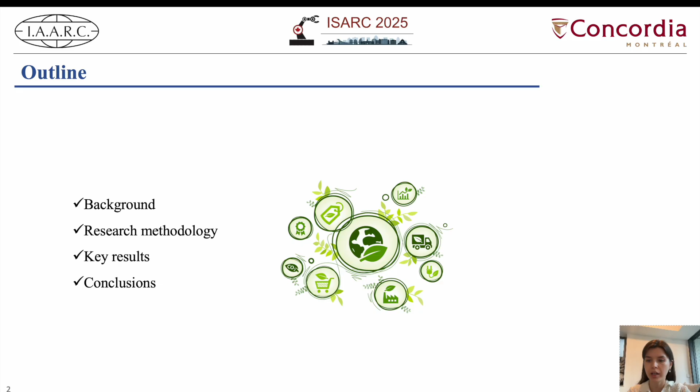The construction industry is responsible for a significant amount of global carbon dioxide emissions, resource and environmental damage and degradation. Traditional concrete relies heavily on natural resources like sand and cement, both of which have high ecological costs. In this work, we explore how waste concrete materials, specifically recycled fine aggregates and industrial byproducts like fly ash and blast slag, GGBS slag, can be transformed into valuable resources for 3D printed construction.

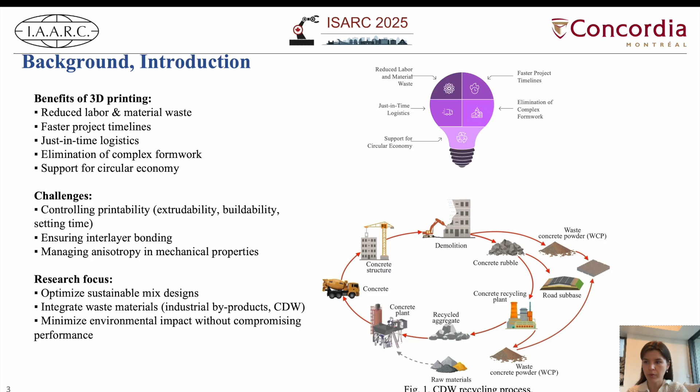We evaluate both the technical performance and sustainability impacts of these materials, including a detailed life cycle assessment comparing 3D printed structures with traditional casting. Our goal is to offer a more sustainable and economically viable pathway for the future of construction. And now let's go to our methodology.

The methodology consists of several key stages. We started with a comprehensive literature review with three steps: 3D printing in geopolymers, 3D printing with recycled aggregates, and the incorporation of waste concrete into 3D printed materials. Based on insights from the literature review and based on the results of our preliminary laboratory testing, we developed a

mix design. We prepared four different samples, two for 3D printing, one with natural fine aggregate, and another one with recycled fine aggregate, and also two samples for casting with natural and recycled fine aggregates. Next, we evaluated the fresh properties of each mixture to assess printability and workability.

After that, we conducted compressive strength tests on the 7th day of the carbonation curing. These tests were performed in three orientations, XYZ, to reflect the anisotropy behavior of 3D printed concrete, and it was in accordance with standard procedure.

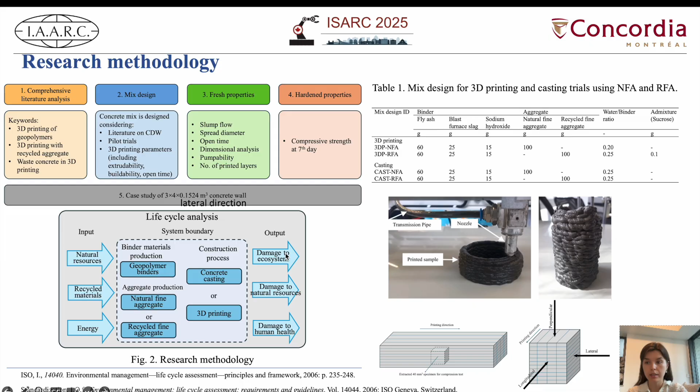Finally, we carried out a life cycle assessment to compare the environmental impacts of 3D printed concrete with traditional casting. And the life cycle assessment focused on three key categories: damage to ecosystem, to natural resources, to human health.

In our life cycle assessment, we examined a realistic case study of a standard concrete wall constructed using both 3D printing and traditional casting methods. We considered not only the materials but also the energy consumption, equipment, and time requirements for each stage of the construction process. For 3D printing, we accounted for the energy during mixing, printing, and infill, as well as the time needed for material preparation and extrusion.

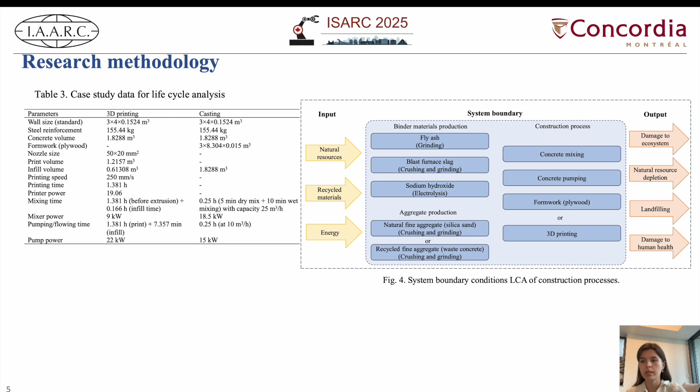In the casting process, we included the use of formwork, mixing operation, and pumping, along with the energy associated with each step. We observed that the recycled aggregate mixture for casting had the lowest slump due to the irregular shape of the recycled particles. So for 3D printing, this mixture was initially too stiff to pump, so we added a small amount of sucrose to improve its flowability.

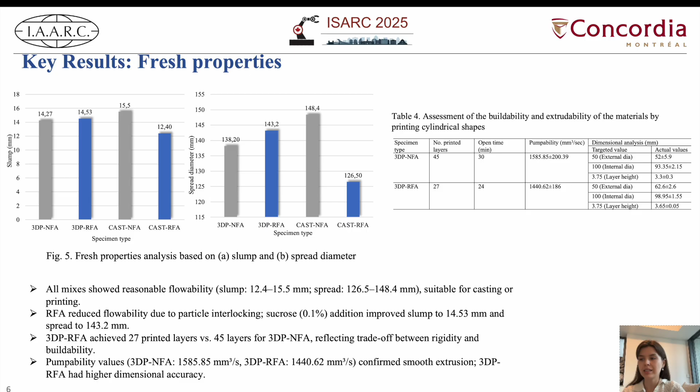Recycled mixture showed better dimensional control, which was confirmed through real-time printing trials. Overall, all mixtures with recycled fine aggregates showed better stability and dimensional accuracy, which are key for successful 3D printing. We evaluated the 7-day compressive strength.

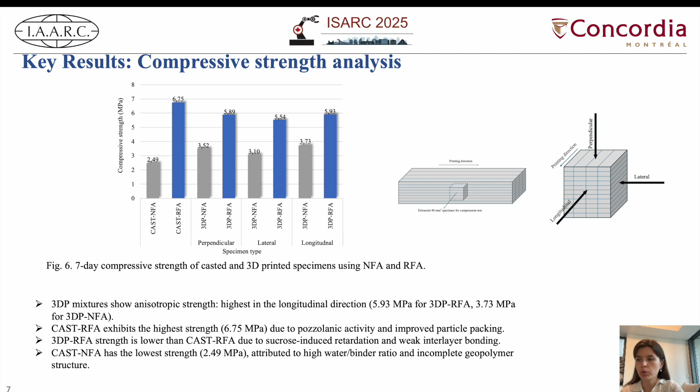As expected, the cast samples with recycled aggregates showed the higher strengths overall due to better compaction and a more monolithic structure. And the 3D printed samples show slightly lower strengths, especially in the lateral direction due to the layered structure and presence of interfacial voids. So strengths varied depending on the loading direction, with the highest values recorded along the printing path. Recycled aggregates performed well in both methods, demonstrating their strong potential for structural application in 3D printed construction.

In our case study, we found that the use of recycled aggregates reduced global warming potential by over 6% in 3D printing and about 4.5% in casting. Among the two methods, 3D printing consistently showed lower global warming potential, primarily because it avoids the use of plywood formwork, which added nearly 20% extra emissions in the casting process.

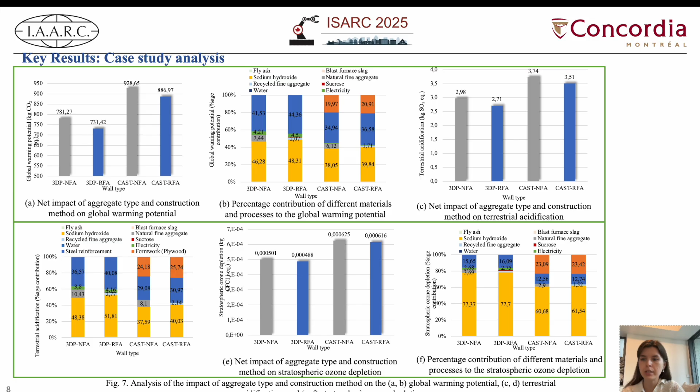We also observed that sodium hydroxide and steel reinforcement were the main sources of environmental impact due to their energy-intensive production process. Overall, 3D printing with recycled materials not only performs well technically, but also significantly reduces environmental impact, especially in terms of global warming, acidification, and ozone layer depletion.

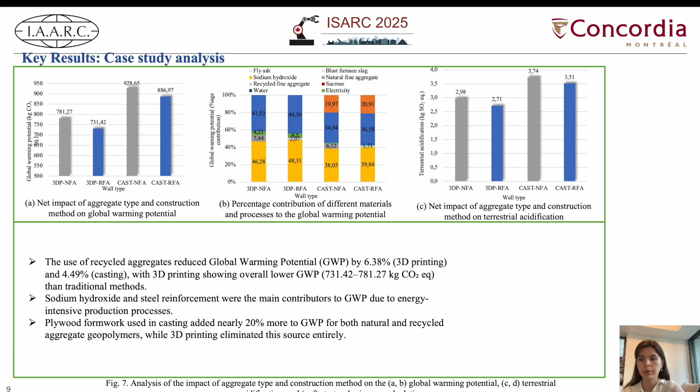To evaluate the overall sustainability of each material and method, we used the overall performance index, like rank. This index combines and normalizes all impact categories across ecosystems, resources, and human health dimensions. In our study, all categories were equally weighted, and the results show that the 3D printed wall using recycled materials had the lowest overall environmental impact and ranked first.

Compared to casting, 3D printing reduced the total environmental impact by nearly 30%, and the use of recycled aggregates contributed an additional 6% improvement. Our sensitivity analysis focused on the reusability of plywood formwork in the casting process. While materials like sodium hydroxide and steel cannot easily be reduced without compromising strength, formwork can potentially be reused, depending on the quality of the material and the complexity of the building design.

The results show that reusing formwork even once can significantly lower environmental impact. However, when we use it 10 times, for example, the overall impact of casting still remains higher than 3D printing, which requires no formwork at all. So this demonstrates that 3D printing is not only more efficient, but also less sensitive to design complexity, making it a scalable solution for sustainable construction.

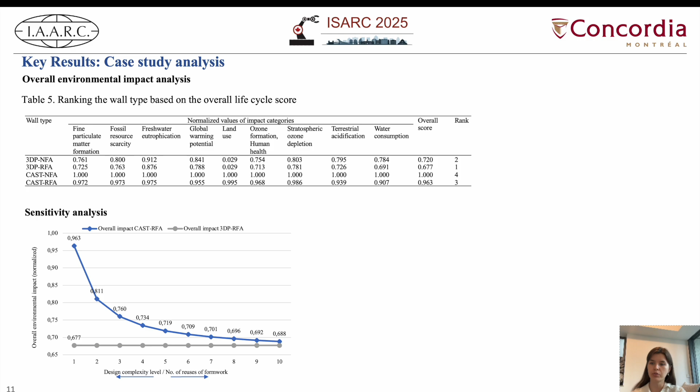We demonstrated that with small adjustments like lowering the water-to-binder ratio for natural aggregates and adding a small amount of sucrose for recycled ones, both printability and buildability could be achieved. Mixtures with recycled fine aggregates showed higher compressive strengths than those with natural ones, especially in casting. In 3D printing, strength was slightly lower due to the use of sucrose, but still within acceptable limits.

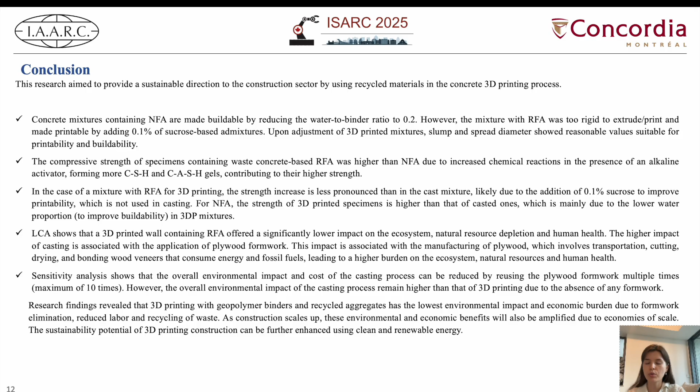Our life cycle assessment showed that 3D printed walls using recycled aggregates had significantly lower environmental impact, primarily because they eliminate the need for plywood formwork. Even though reusing formwork in casting can reduce impact, the 3D printing process still remains more sustainable overall. These benefits will only grow stronger with the use of renewable energy and industrial scale adoption.